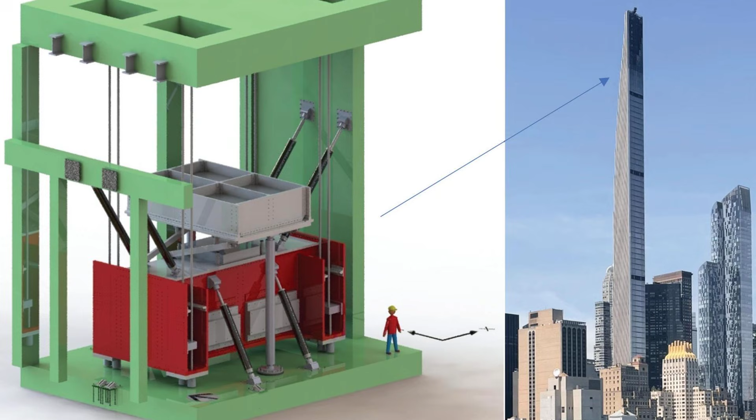Units above the 80th floor commanded premiums of 20% or more, fueling an internal revenue model that projected $3.1 billion in sales. The spreadsheets told a clear story. Each additional story of height unlocked millions in extra value, with the most dramatic gains concentrated at the very top. But this chase for altitude came with warnings.

Meeting minutes from the city's Economic Development Committee noted that the 1:15 height-to-width ratio would push the tower into a class of buildings known for extreme wind response. Engineers at WSP, the structural firm on the project, flagged that the natural period of the building, how much it sways, would exceed comfort limits set by the city's own guidelines.

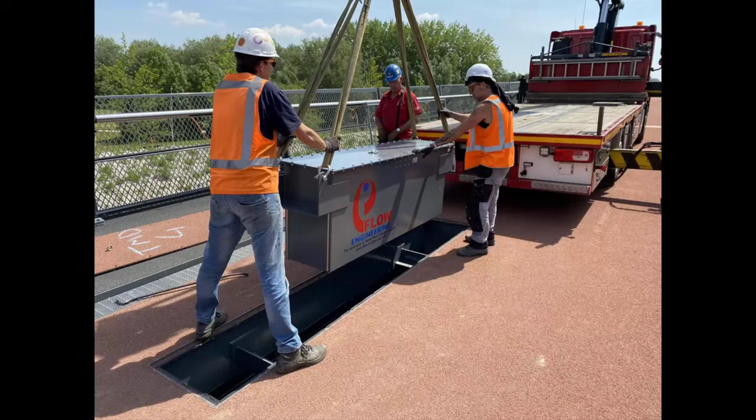A memo from WSP, later submitted as evidence in court, laid out the risk. Wind tunnel testing showed sway accelerations up to 15% higher than recommended. The engineering team advised that additional damping or a larger footprint could bring the building back within accepted standards, but those changes would eat into the projected profits. Instead, the financial model won out.

The 93-foot base stayed. The developer's own sales director, under oath in the 2021 lawsuit, admitted that the decision to keep the slender profile was driven by an $800 million revenue uplift projected for the upper floors. Comfort and caution were weighed, measured, and ultimately set aside in favor of maximizing return. In the end, the building's most celebrated feature, its impossible slenderness, became the source of its deepest vulnerabilities.

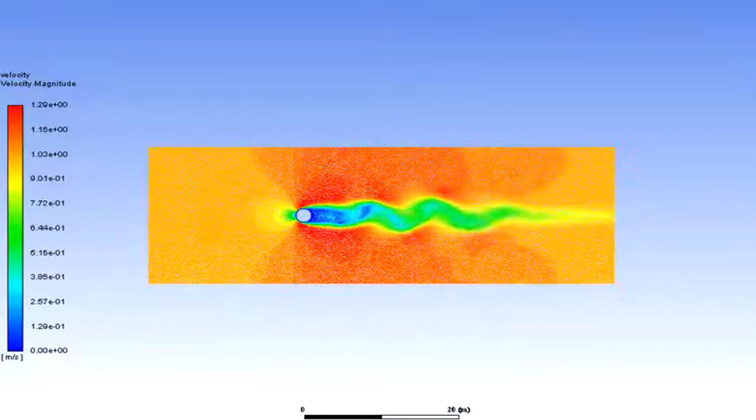Wind doesn't just push on a skyscraper, it sets up invisible patterns that can shake a building to its core. At 432 Park Avenue, the wind's dance around the square tower triggered a phenomenon called vortex shedding. As air flows past the rigid 93-foot-wide face, it forms alternating pressure zones, peeling off swirling vortices at regular intervals.

The tower's own natural sway frequency, measured by RWDI at about 0.2 Hz, lined up almost perfectly with the frequency of these wind-borne pulses. That meant even moderate gusts could set the entire structure in motion, amplifying side-to-side drift and rattling everything inside. To fight this, the design team tried a layered approach.

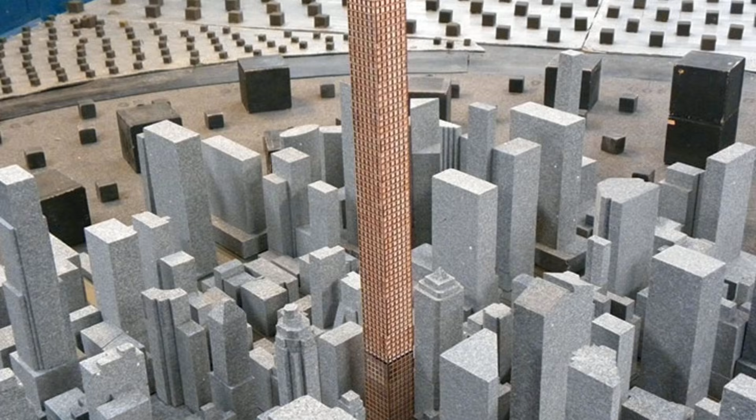6 open mechanical floors spaced up the tower were supposed to act as wind corridors, breaks in the facade that would let air pass through and lower the pressure on the building. Lab tests suggested the gaps could cut drag by about 30%. But the real-world data told a different story. The open floors reduced the overall push, but they didn't change the underlying rhythm of vortex shedding. When the wind hit just right, the building still swayed in sync with the air's invisible beat.

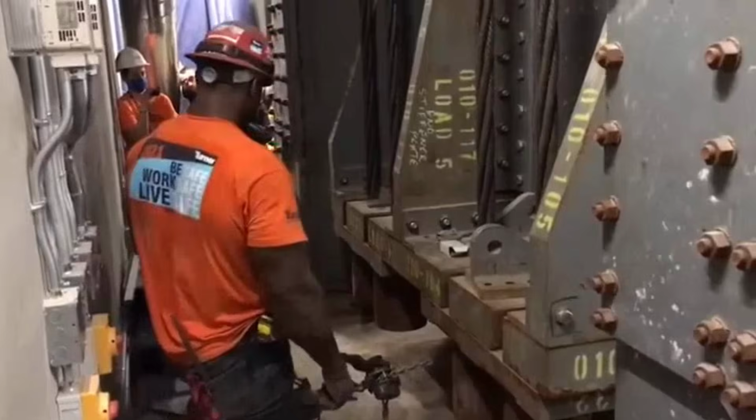As complaints piled up, engineers turned to a more active fix. 2 massive tuned mass dampers, each weighing around 660 tons, were installed between the 86th and 89th floors. These giant pendulums were tuned to the building's main sway frequency, designed to absorb energy and calm the motion.

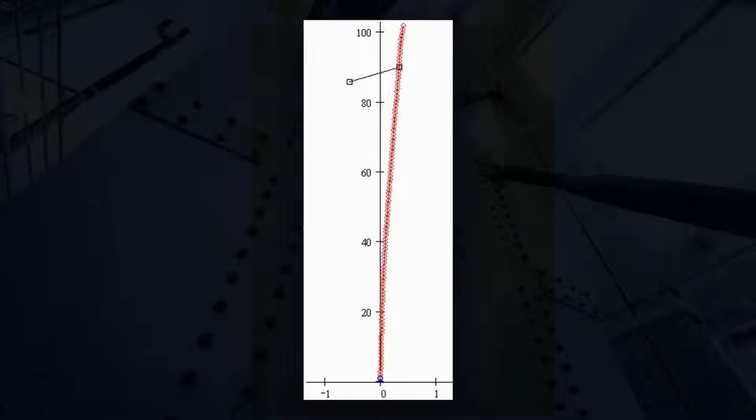But even with this hardware in place, the tower's sensors recorded a dramatic event on October 31, 2019. A 71 miles per hour gust struck Manhattan, and the top of the building drifted nearly 5 centimeters, well above comfort thresholds for residential towers. The open mechanical floors and the new dampers together could not fully suppress the resonance. For residents, the technical promise of stability clashed with the lived reality of a skyscraper that moved more than anyone expected.

Maria moved into her 85th floor apartment expecting quiet luxury. Instead, her first spring brought a surprise. Each morning, she found her marble fruit bowl had shifted nearly 2 inches across the kitchen counter. On windy nights, the walls let out a low, steady creak, sometimes loud enough to wake her at 3 a.m. In her diary, she wrote, "It feels like the building is breathing. Sometimes the doors won't close, and the floor seems to move under my feet."

She wasn't alone. By the end of the first year, the condo board had logged more than 200 resident complaints about motion, noise, and strange vibrations. One neighbor described the sensation as living on a gently rocking boat, while another said, "My chandelier sways even when the window is shut."

During a gusty week in October, Maria recorded the sound of her apartment, a rhythmic groan that matched the wind's push. She sent the audio to building management. The official response? The movement was within design limits, but the daily reminders, shifting countertops, misaligned cabinet doors, and the persistent, unnerving creak told a different story.

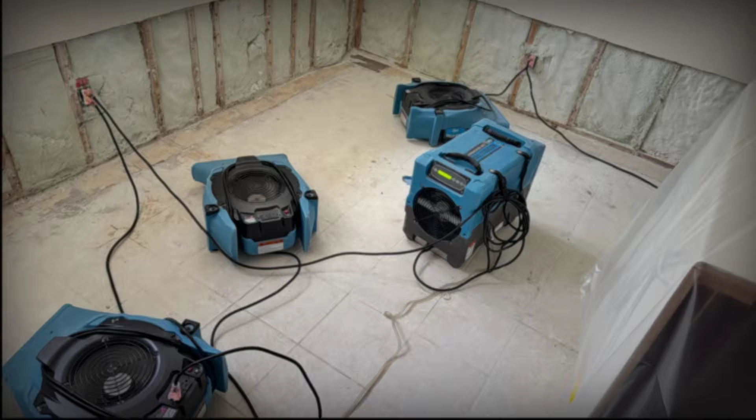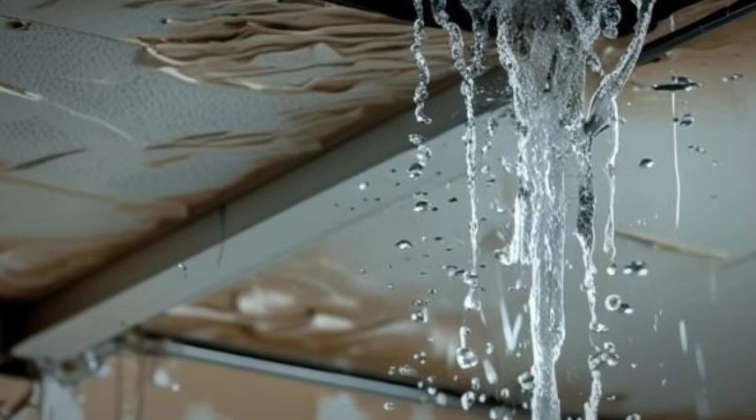For many, the tower's promise of stillness and exclusivity had been replaced by a constant, uneasy motion that no one could ignore. Water, electricity, and trash, systems that should run quietly in the background, became daily reminders of the building's hidden instability. In 2016, a pipe joint on the 84th floor failed, unleashing a flood that damaged multiple units below. Maintenance logs from Lendlease, the construction manager, traced the rupture to flexing supports overstressed by the tower's constant sway.

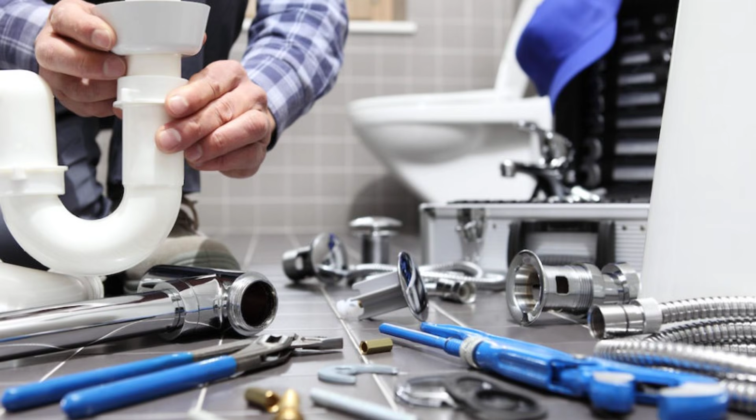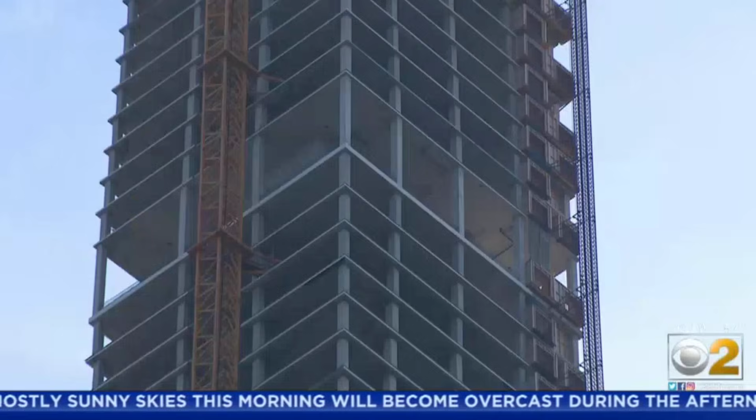The fix was temporary. Over the next 5 years, service teams responded to a steady stream of water hammer events and cracked pipe brackets, each incident a symptom of deeper mechanical stress. Elevators designed to whisk residents from lobby to penthouse in under a minute began to falter as well. On a windy afternoon in June 2021, a sudden gust triggered the building's wind protocol, halting all elevator service. One resident was trapped for 90 minutes at height, while technicians struggled to reset the system.

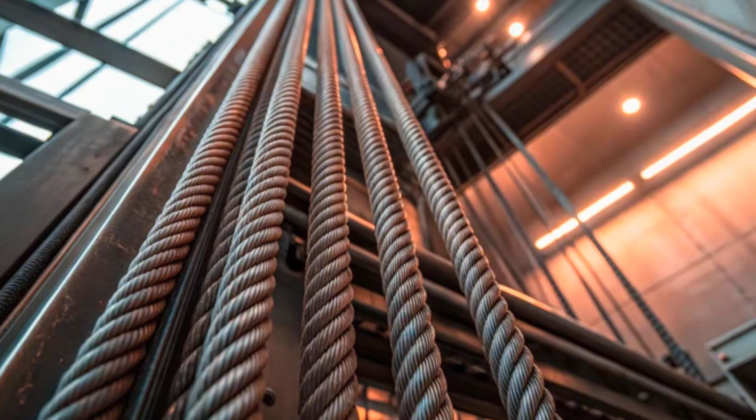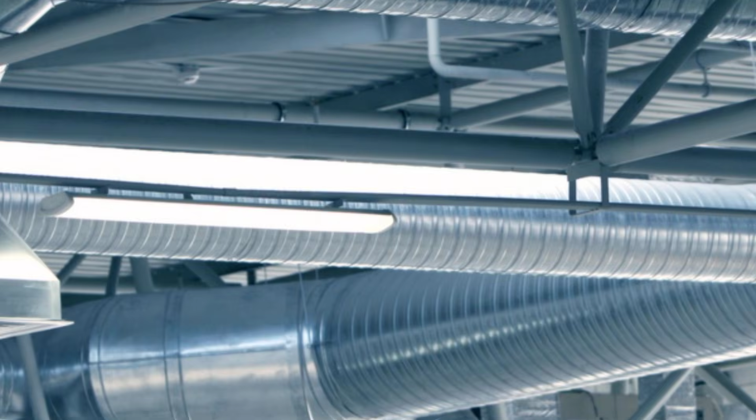Engineers later found that elevator cables had slapped against the shaft rails, a direct result of lateral building movement. Routine elevator shutdowns became a recurring feature whenever winds topped 50 miles per hour. The HVAC system, too, struggled to adapt. Ductwork mounted to the shifting structure began to vibrate in resonance with the building's sway, producing a low-frequency whoosh that echoed through apartments, especially between the 50th and 70th floors. Requests for duct realignment and seal replacements spiked, filling maintenance logs with complaints of rattling vents and unexpected drafts.

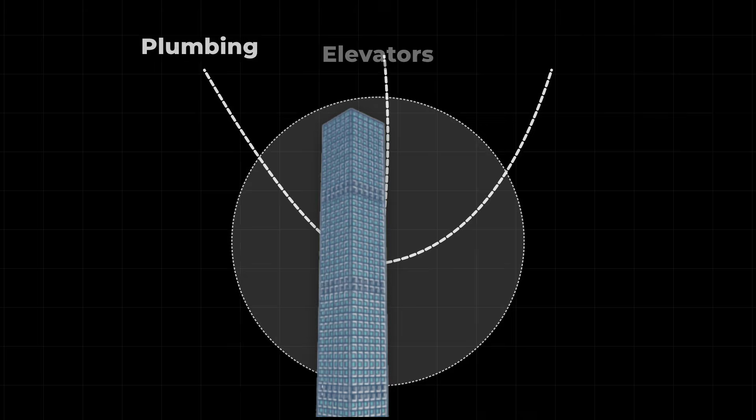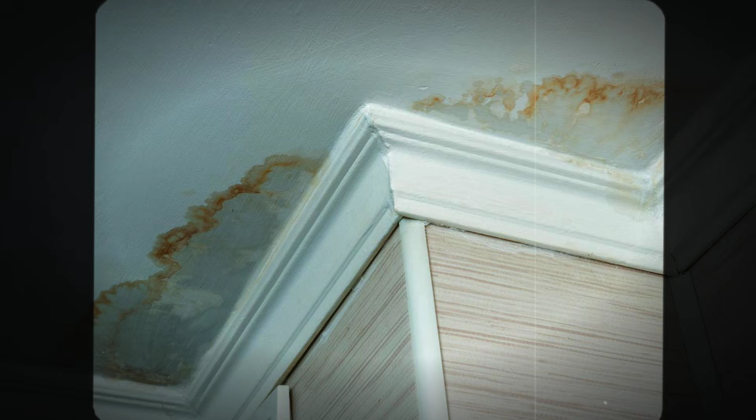Perhaps the most bizarre consequence emerged in the trash chute. During strong sway events, the pressure inside the 1,300-foot chute would surge, sending debris hurtling upward before slamming back down in a blast of noise and broken bags. The cause? Rapid vertical acceleration, momentarily reducing gravity's pull, then snapping back as the building settled. Each of these failures, isolated on their own, pointed to a larger pattern. Internal systems pushed to the brink by forces the design never fully tamed.

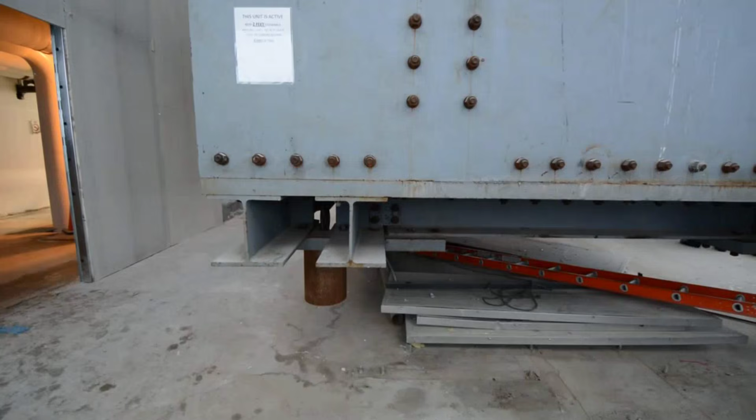On September 23, 2021, the board representing 432 Park Avenue's residents filed a sweeping lawsuit in New York State Supreme Court. The complaint ran to hundreds of pages and cataloged more than 1,500 alleged design and construction defects, with over 500 directly tied to engineering and mechanical failures. The damages claim started at $125 million, but quickly escalated to $165 million as new problems surfaced. Cracked facade panels, repeated flooding, elevator malfunctions, and the trash chute's violent pressure surges.

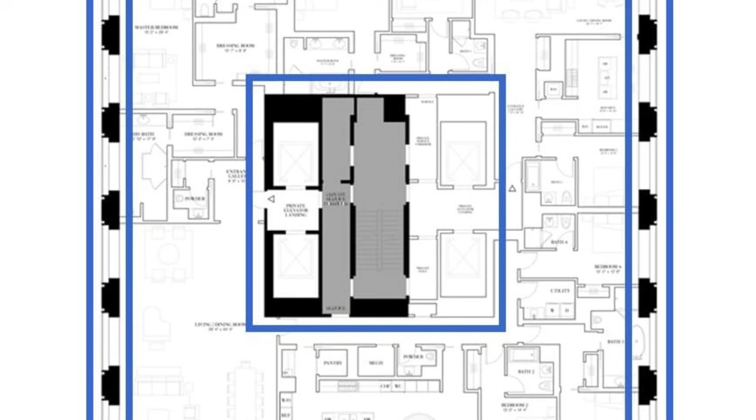James Kay, the lead attorney for the condo board, described the situation as a parade of hidden dangers, citing expert reports that linked the building's slenderness and cost-saving substitutions to the ongoing failures. The suit named the developer CIM Group, the construction manager Lendlease, WSP Cantor Seinuk, and other key firms, arguing that the project's most celebrated features had become sources of risk and loss.

The legal filings included engineering memos, resident complaints, and maintenance logs, all pointing to a pattern of systemic issues rather than isolated mishaps. The case did more than demand repairs. It quantified the financial and reputational stakes for a tower once sold as the ultimate address, now facing the prospect of a courtroom reckoning. The lawsuit's ripple effect was immediate. Within months of the legal filings, price tracking reports showed resale values at 432 Park Avenue dipping 15 to 20% below their original asking prices.

Listings that once boasted record-setting square-foot numbers lingered on the market, sometimes slashed by millions to attract wary buyers. The tower's brand, once synonymous with exclusivity, began to erode in the eyes of brokers and analysts alike. A senior real estate analyst at Miller Samuel described the building's new reality: 432 Park went from a crown jewel to a cautionary tale almost overnight. Headlines about cracked walls and elevator shutdowns replaced glossy marketing campaigns.

For owners, the promise of a blue-chip investment gave way to a sobering calculation: how much value had evaporated, and how long would the stigma last? The building that once set the pace for luxury now found itself struggling to hold its place in the city's pecking order. Luxury towers still climb ever higher, but 432 Park Avenue stands as a caution. Prestige and price can't override physics. As cities chase record-breaking skylines, the stakes are no longer just financial. They're structural, legal, and human. Even the world's tallest ambitions must answer to reality.